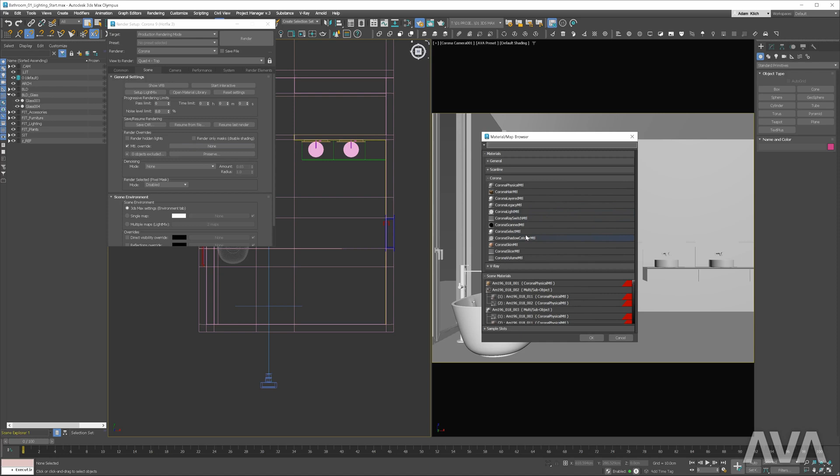Next, let's override the materials. We have to exclude the glass.

We'll be using HDRI lighting here also, but again, let's start with Corona Sun and Sky first to see what the default lights look like.

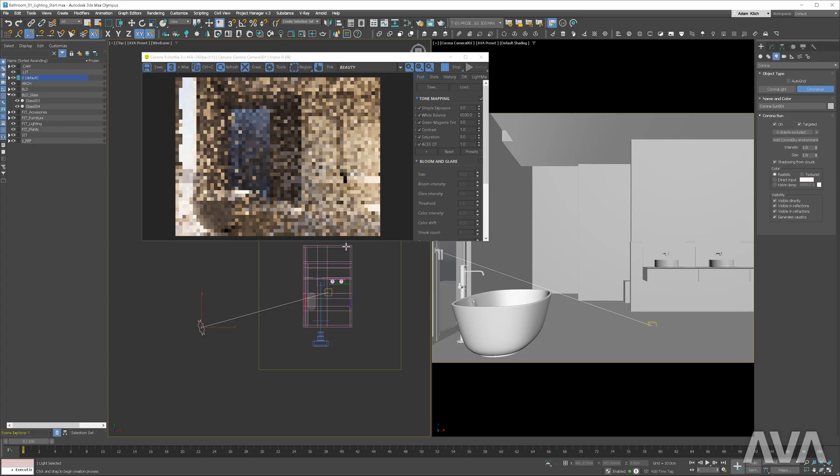Add the sun. I will try to find the best position and then, based on that, adjust an HDRI map. I like that we have a really cool light and shadow on the wall with the wash basins. Let's copy the view to the max window.

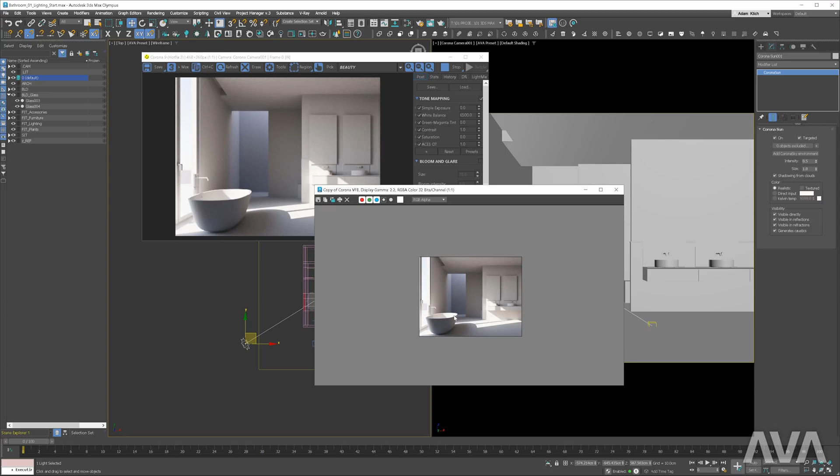Then, clear the sun and sky. As I said before, we'll be using an HDRI setup.

Here is the map from HDR Maps we'll be using in this tutorial. You can find this texture in your working files. Open the material editor, add the Corona bitmap, and locate your map.

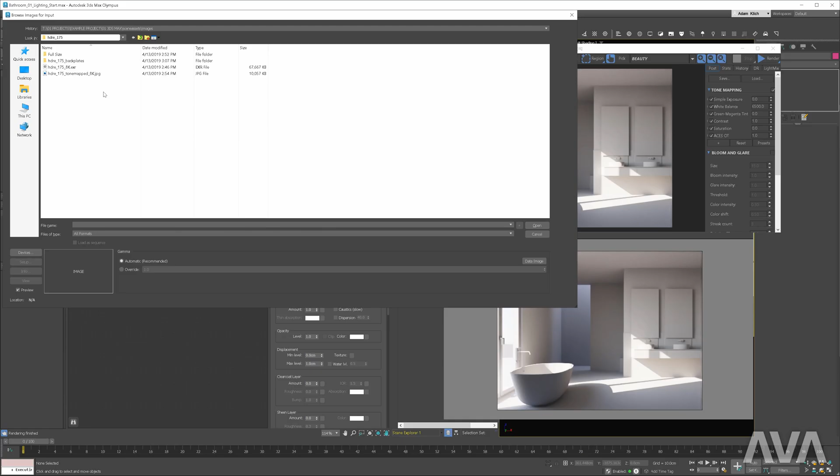Next, plug it into the environment slot.

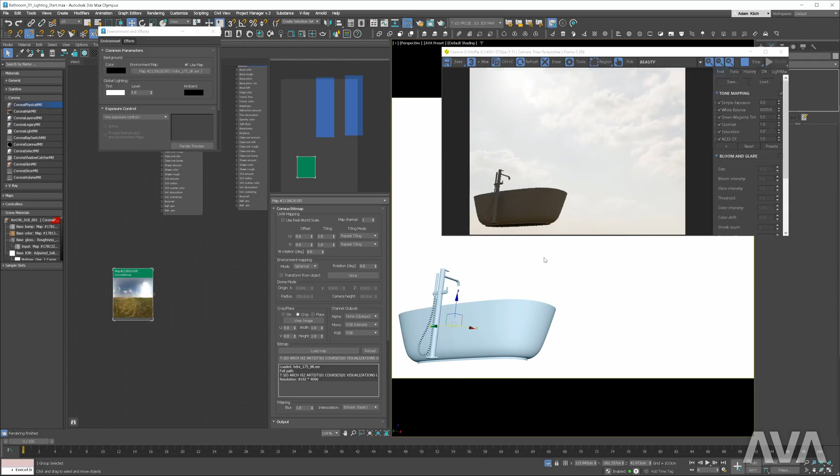Here you can see that these areas are super overexposed, but it is just a preview. If you render it, you can see that we have all the information. And if we lower the exposure, we can see even more details.

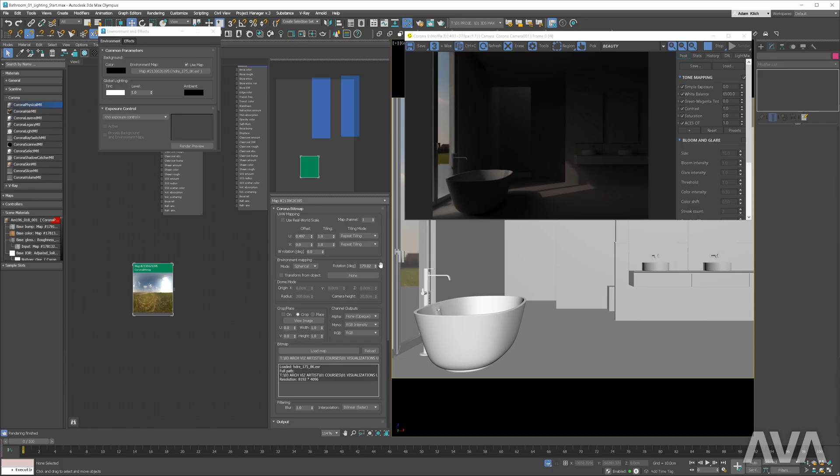Now let's find the best angle for the HDRI map. Here, around 170 degrees, we have very similar lighting.

We have to adjust the exposure. Add Corona Color Correct map and replace the map in the environment slot. Adjust the exposure. A value 4 works for me.

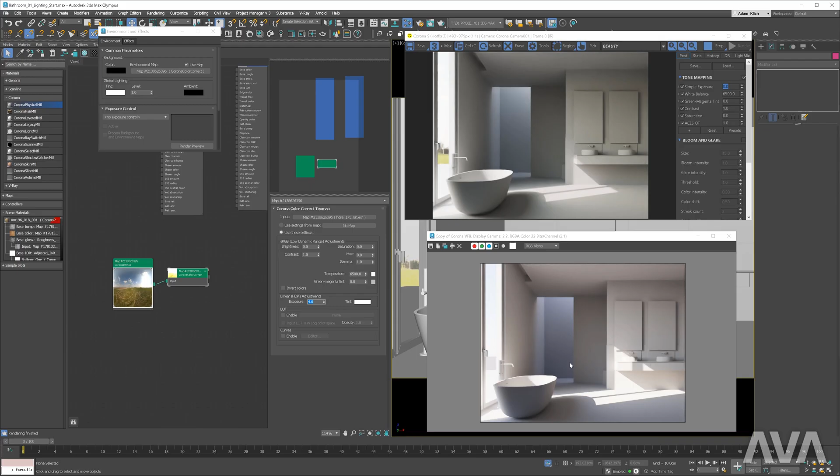Next, let's adjust the gamma settings. As you remember, the lower values will result in very harsh lighting. The sun is very strong compared to the sky. On the other hand, the higher gamma results in a softer image.

I will start with a value of 1.5 and adjust the exposure. Now it's a bit too soft as we can't even see the sun. So I will lower it to 1.2 and then adjust the exposure. Maybe even lower. Nice, I like that.

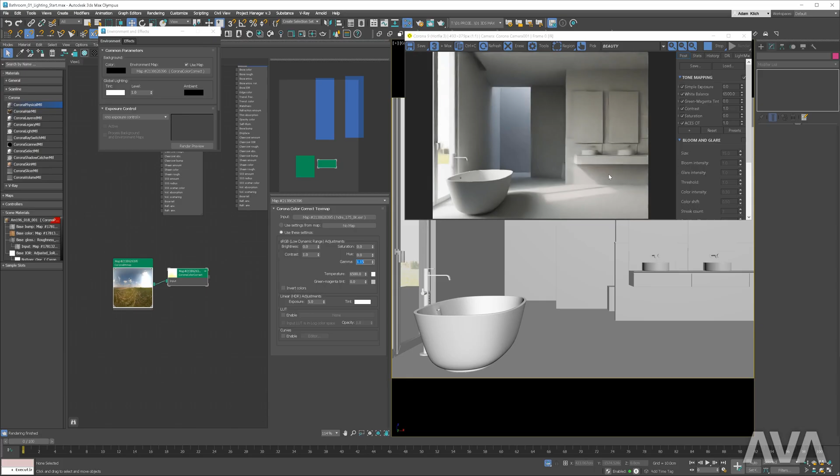Add the curtain from Evermotion, as it may affect the light a bit. We have to exclude it from material override.

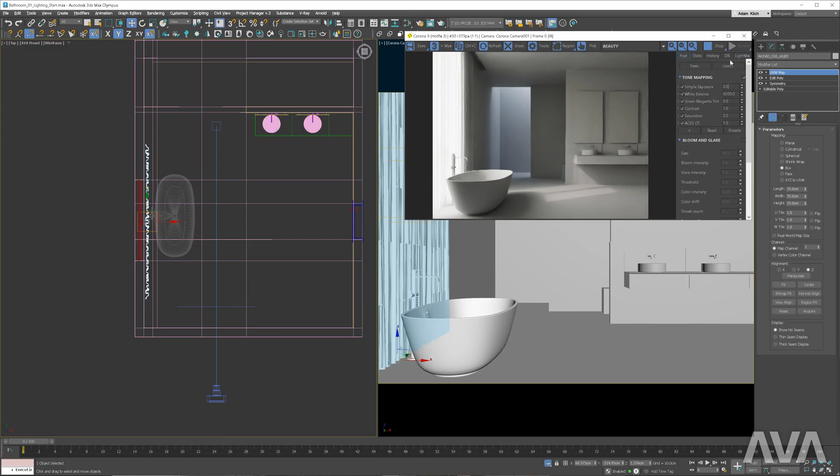Looking good. I will add the light above the curtain. Let's change the type to a rectangle and adjust the size and position.

Before I set up the light mix, I will add 2 more lights behind the mirrors. Make an instance. Now we can set up the light mix. Use the instance light options.

I will rename the elements so it's easier to locate them later in the light mix. Let's see how it looks rendered. I will turn off all the lights except the light above the curtain for now.

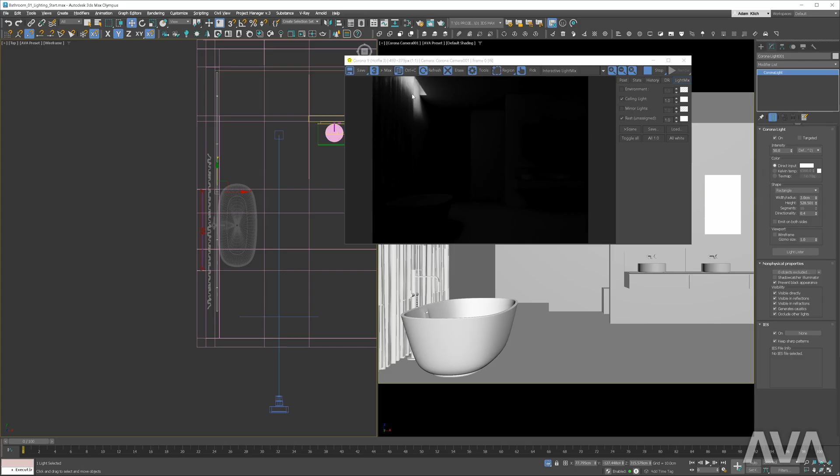Adjust the settings. I will make it more directional, so it will be more focused and less spread out. I will also make it way warmer and adjust the intensity a bit.

Looks good. Next, let's position the mirror lights in the correct place and adjust the size.

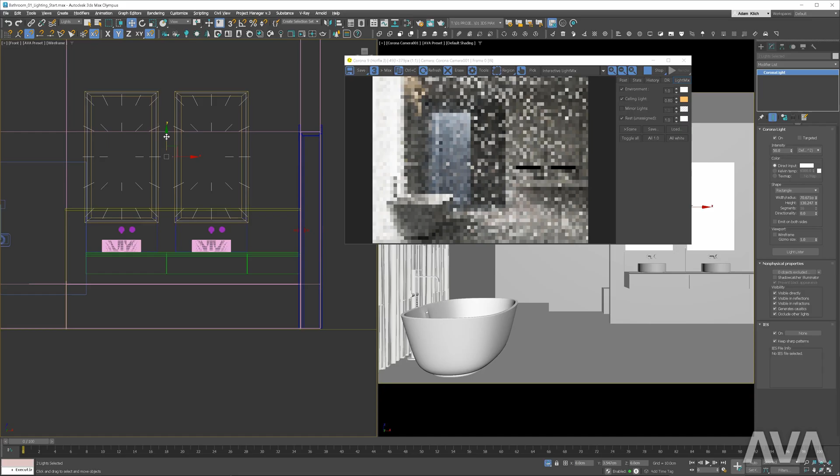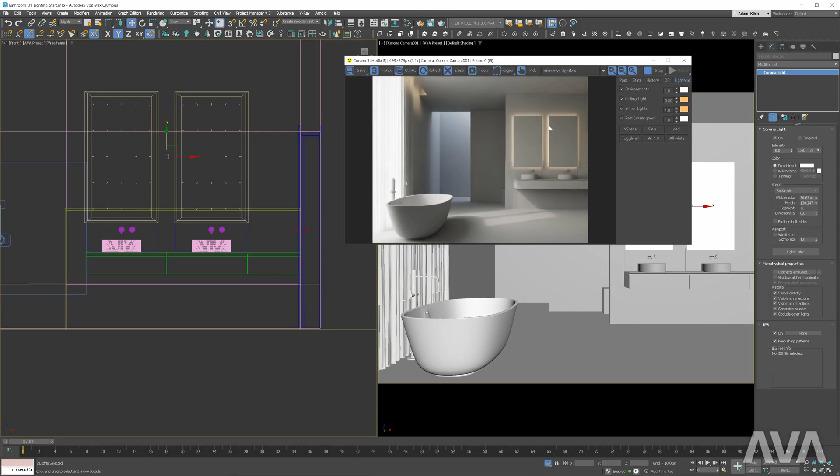Great! Next, let's adjust the intensity and the color. Awesome!

Here you can also see that we have this green tint from the grass, a similar issue as we did in the kitchen image. So let's use the same fix.

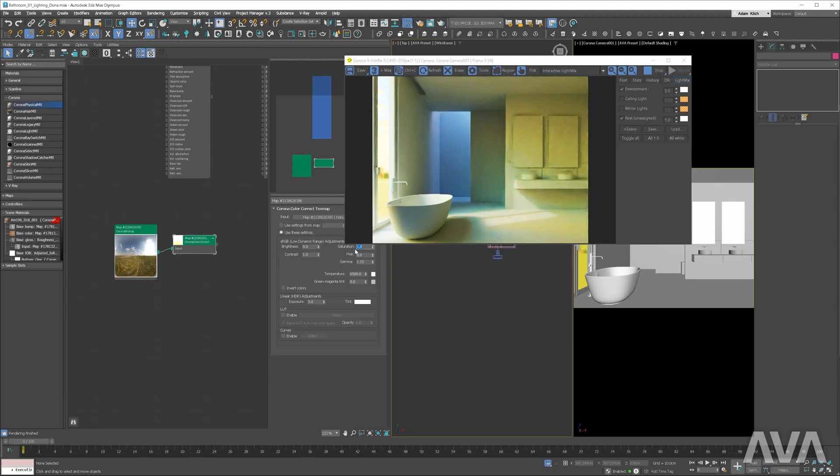I will open the HDRI in Photoshop, add a gray color to the bottom part of the image, and save it.

Now you can see that the issue is instantly gone.